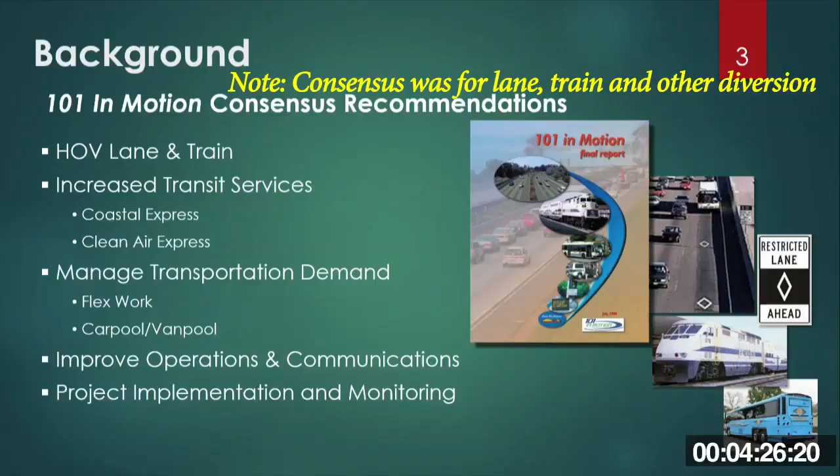The lane and the train strategy was really all about adding an HOV lane in the section of 101 where it remains two lanes in the southern part of the city of Santa Barbara down through Carpinteria to the county line. The trains portion of the strategy was to bring commuter-friendly rail service up into Santa Barbara from Ventura and points south, and up into Goleta. Those are the key components, and then there was additional components in terms of increased transit services, managed transportation demand, and other smaller components that were all about this larger package working together to provide congestion relief long term.

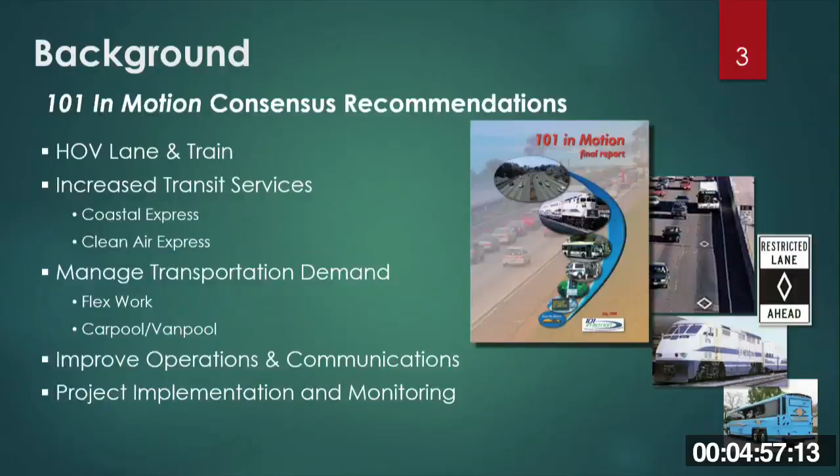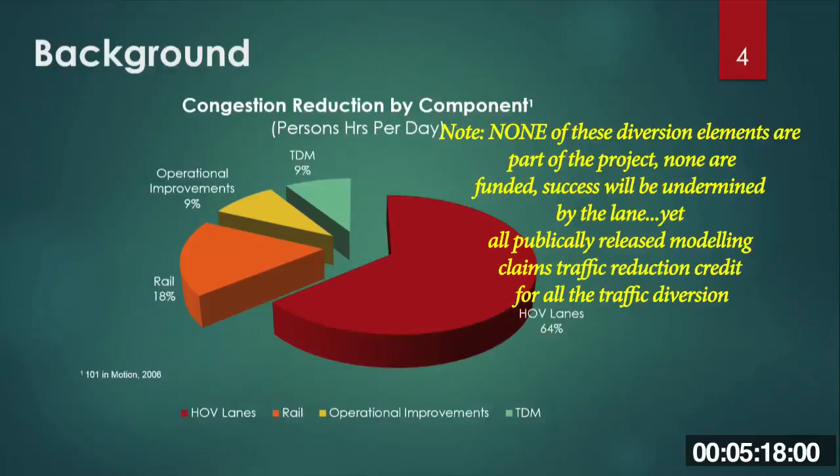This slide shows the different components and the amount of benefit they bring to the table in providing that long-term congestion relief. As you can see, the HOV lanes are a key part of that. The other thing you can see here is that the larger strategy all has to work together ultimately to provide the congestion relief we need. Additional commuter service on its own does not provide the congestion relief we need, nor does an HOV lane project on its own provide that congestion relief we need.

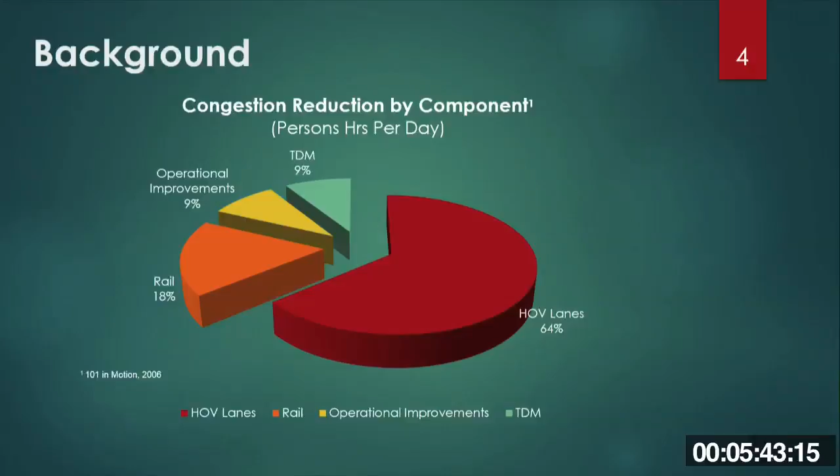The other thing I'll mention is that the HOV lanes are peak hour focused HOV lanes, which means they're available only to selected users during peak hours to manage those peak times, and then the rest of the 24-hour day and on weekends, it's available to any user moving through the corridor.

So how does this lane strategy come together? The one component that's the HOV portion of it. It's really a four-part strategy, and 3 of the 4 pieces have either been constructed or are under construction now.

The first is the Milpas to Hot Springs project, completed in 2012 in the city of Santa Barbara. The second is the Mussel Shoals to Carpinteria project, a 6-mile long project that provided HOV lanes in each direction on 101 from the community of Mussel Shoals up through into the city of Carpinteria.

The third project is the Linden and Casitas Pass interchanges project that's under construction now. If you've driven through there, you'll see a lot of disturbance. That project is fully funded and under construction, and it should be completed in about 3 years.

The last piece of that puzzle is the 101 HOV lanes project. That's the fourth piece, number 4 there. That's the subject of the project today and the environmental document we just released. It will provide the final piece of this larger picture, providing HOV lanes all the way through that 16-mile corridor.

The other thing I want to mention is that there's a series of related or parallel projects associated with the HOV and other improvement efforts in this corridor. Two of those are highlighted in the city of Santa Barbara: the Olive Mill intersection with Coast Village Road, and the Cabrillo Railroad structure replacement.

There's also others in the county and down in Carpinteria, specifically Olive Mill, the railroad structure, and the San Ysidro interchange. The SBCAG board in 2014, as part of a larger decision supporting the HOV project moving forward, deemed those specific improvements as important parallel improvements, directing SBCAG staff to work with local jurisdictions to move those projects forward. So those still have that designation, and they are taking on a life of their own and moving forward.

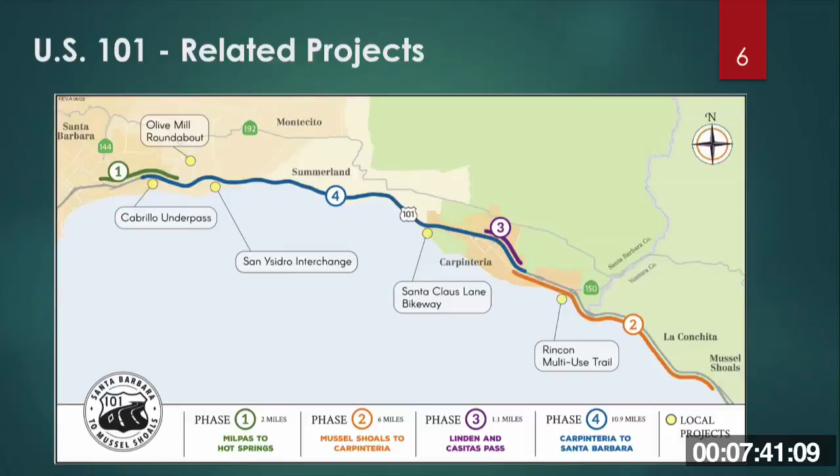So with that, I'll turn it over to Jason Wilkinson. Why don't you go ahead and we'll switch. I'll just, do you want me to do this? Okay, yeah, that's fine.

So just to give a little history on the project: we released a draft environmental document in March of 2012. We received comments from federal, state, and local governments along with the public, responded to those comments, and released a final environmental document in August of 2014.

Shortly thereafter, there were 2 CEQA lawsuits filed against the project. One had to do with noise, and in that case the judge ruled in favor of Caltrans. The other related to the traffic analysis, in which the judge ruled in favor of the plaintiff. A writ was issued in January 2016 shortly thereafter.

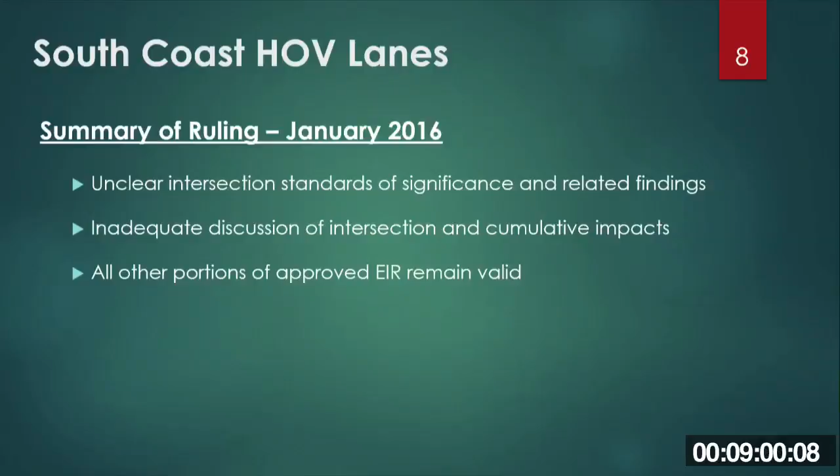A summary of that ruling was that Caltrans did not comply. The other important point that came out of that writ was that all other portions of the EIR remain valid, so the body of work completed in the report remains valid.

So what the Caltrans team did after the writ to comply with it is that the environmental team met with headquarters staff, environmental staff, along with our legal team and the traffic engineers at headquarters traffic. They came up with established evaluation methods and standards of significance that could be used throughout the corridor, and applied not just through the corridor but statewide. They performed the analysis, developed findings, and then released the draft revised EIR.

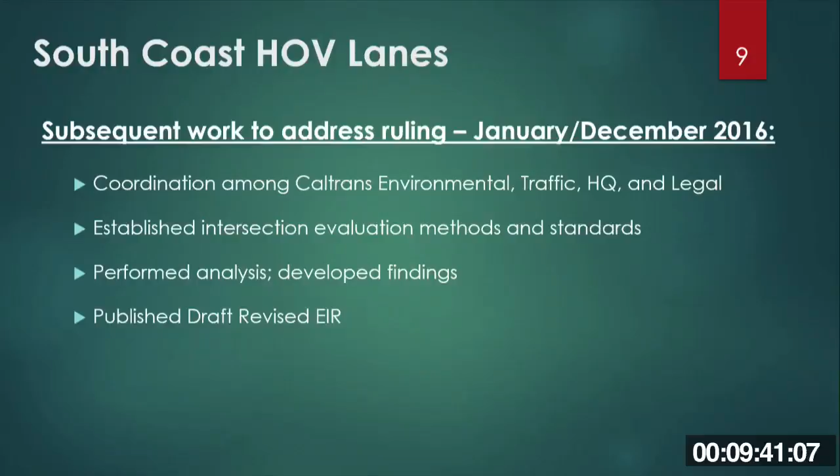It's important to note that a number of technical studies were prepared for the project. They were generated by Dowling and Kittelson Associates, which established a traffic analysis subcommittee involved in preparing the model for the project along with the operational analysis. That team comprised members of City of Santa Barbara staff, City of Carpinteria staff, and county staff, and they reviewed all of the work products that came out of those studies.

On December 2nd, the document was released to the public for circulation. It was originally set for 45 days public circulation, but at the request of the City of Santa Barbara, we extended that to 60 days. The document is available at our website, along with the libraries listed there, and at our office in San Luis Obispo.

If you'd like to make a comment on the document, you can submit it to the address listed on the website or inside the environmental document. You can provide a comment a number of ways, and we'll be accepting comments up until January 31st of this month.

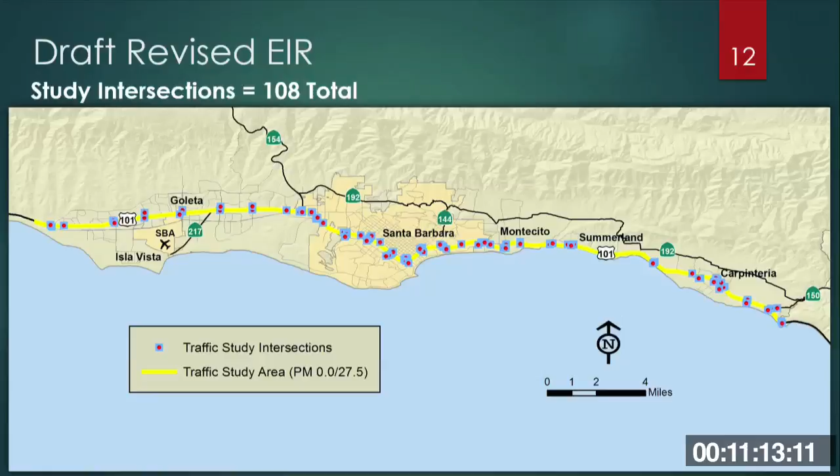This slide indicates the 108 study intersections that we looked at. They begin right at the Santa Barbara-Ventura County line, all the way up to Los Carneros in Goleta. So there's 108 study intersections that we looked at.

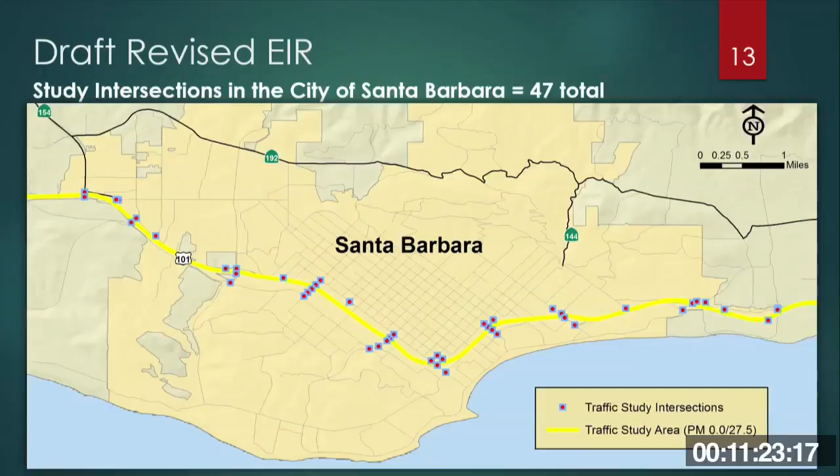This just focuses on the city of Santa Barbara. Within Santa Barbara, there's 47 study intersections that we looked at that were part of our analysis.

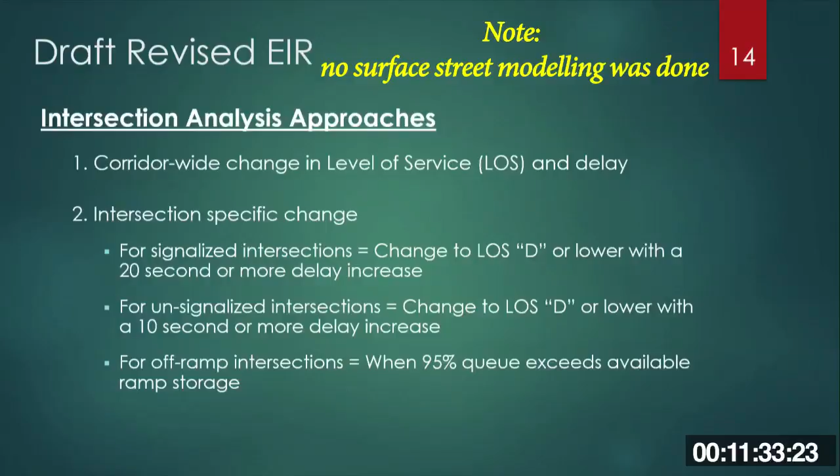Our approach, which came out of meeting with the environmental team, was to look at the corridor at level of service and seconds of delay. We'd next look at the study intersections, and what we'd look at is whether or not the intersection had changed from a level of service D or lower with an additional 20 or 10 seconds based on the signal type. The other thing we'd be looking at is the 95% queue for the off-ramps.

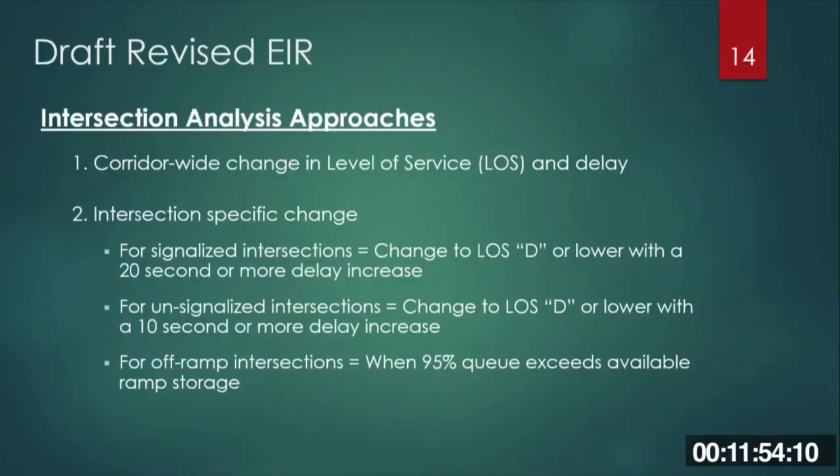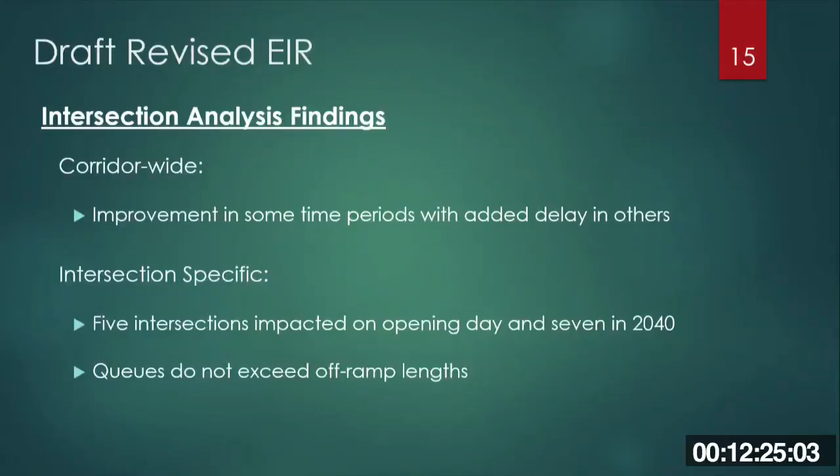What we found is corridor-wide there were some improvements during some periods of the day and added delay in others. When we looked at the study intersections, 5 intersections were triggered on opening day and 7 in 2040 - 5 of the 7 are triggered at opening day and in 2040. We also discovered that the queues did not exceed the off-ramp lengths.

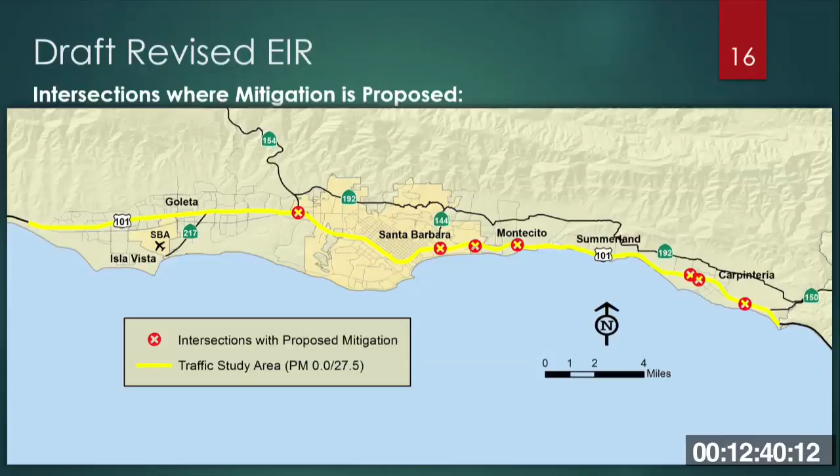This slide shows the 7 intersections that were triggered by our standard. There's 3 in Carpinteria, 1 in the county, and then 3 in the city of Santa Barbara. These 3 are the ones in the city of Santa Barbara: State Street 154 southbound on-ramp, Milpas southbound off-ramp (the first one), and the Cabrillo-Los Patos intersection.

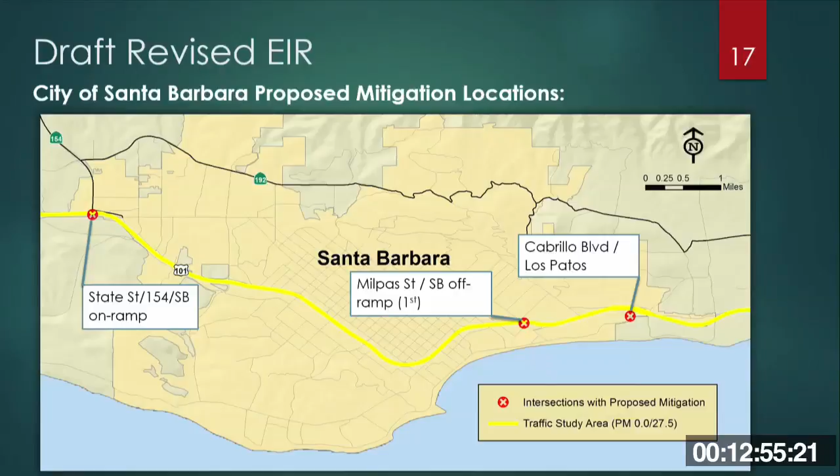For our proposed mitigation strategy, for 2 of them the state would take the lead on making improvements at Milpas Street southbound off-ramp and State Street. The options there would be a second right-hand turn lane ramp at Milpas, and for State Street/Route 154, signal coordination and optimization. At Cabrillo-Los Patos, Caltrans would be looking to make a contribution to the city for them to make the improvements, with 2 options: install a signal or a single lane roundabout.

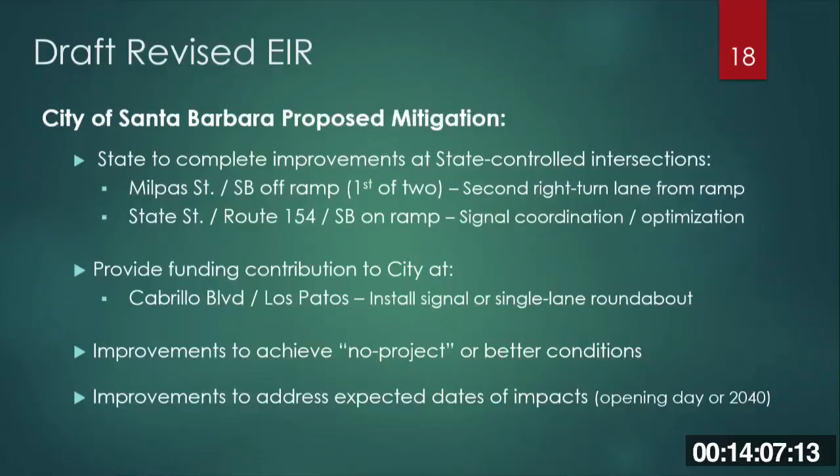Our strategy would be for improvements to achieve no-build or better conditions. For example, if an intersection with the project had an additional delay of 10 seconds, then any mitigation we provide would reduce the delay by at least 10 seconds. Improvements would be expected to be completed prior to opening day, and the ones for 2040 would be expected to be constructed prior to the impact.

In terms of local agency coordination, we've already been meeting with the city of Santa Barbara. We met with them before we released the draft revised environmental document on December 2nd, and we've had a couple meetings with them since then. We're looking to continue coordinating with them on determining mitigation options and the amount of funding towards contribution to Los Patos, and ensuring that improvements take place prior to opening day.

At this point, I'll be handing it over to Scott E. so he can discuss the next steps on the project.

Thank you. Okay, second to last slide here. In terms of our process moving forward, we expect to accept public comments as well as comments from local jurisdictions and other agencies, and then complete the final environmental document. We'll be looking at every one of the comments that comes in and responding to comments related to the content of the document, then integrating those into a final revised EIR.

We expect that would be approved in late spring of this year. From there we move directly into beginning final design and permitting - part of that is coastal development permitting for the first phase of the project - and begin construction shortly after that.

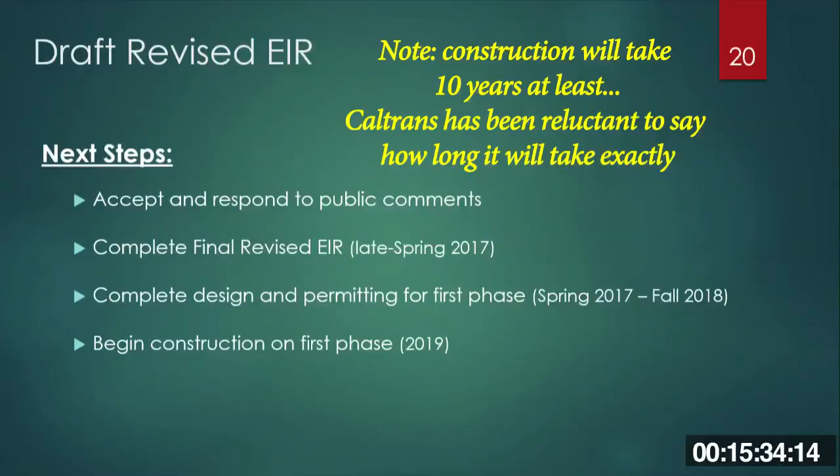Just as a reminder, due to the size and scope of this project, we'd be expecting to construct it in smaller pieces - probably 4 to 5 independent pieces that could be funded and then move into construction independently.

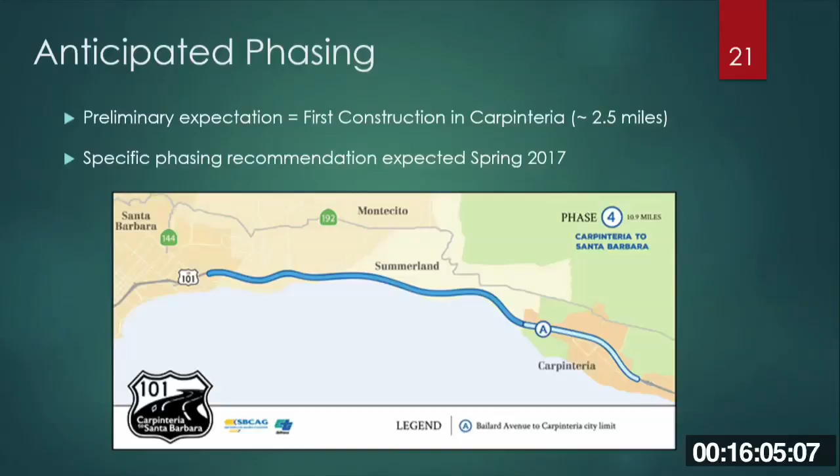In terms of our early expectation for phasing, the preliminary expectation - discussed recently in front of the SBCAG board - is that the first segment, or first phase, would likely occur in the city of Carpinteria. We're also working towards a specific phasing recommendation which would go before the SBCAG board in spring of 2017. If there are any questions on the phasing or related projects, either Tony Harris or Fred Luna are also available to address that content.

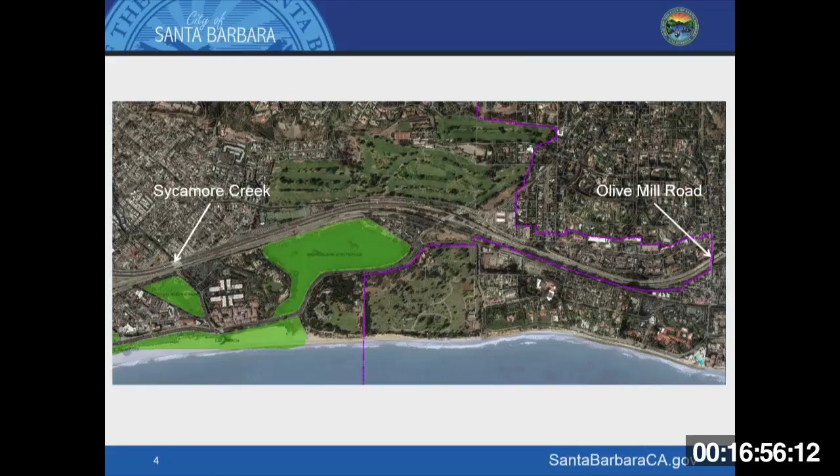You saw a slide very similar to this in Mr. Eads' presentation. What I want to call attention to is the portion of the project that is actually within the city of Santa Barbara. It's a pretty small portion when you consider the totality of the mileage, but from Sycamore Creek, this is the bird refuge, over to the interchange at Olive Mill is the portion of the project within the city of Santa Barbara, and the entire portion of that is also within the coastal zone.

Caltrans is the lead agency and has prepared the environmental impact report. We're the responsible agency, or a responsible agency. Here's what a responsible agency does, and this is what the Planning Commission should be looking to when you think about comments. The comments on the EIR should really focus on the shortcomings and additional alternatives or mitigation measures.

I'll narrow that down even further by saying what Mr. Eads said about the judge who did the writ on the first EIR really narrowed the scope to the intersections. So the revised EIR is focused just on intersections, not air quality or visual impacts.

We're looking at intersections. The Planning Commission must use the EIR for its review of the coastal development permit. So when it comes time for Caltrans and SBCAG to come for a permit, the coastal development permit, you will have to use this document as your decision-making document, specifically for mitigation measures.

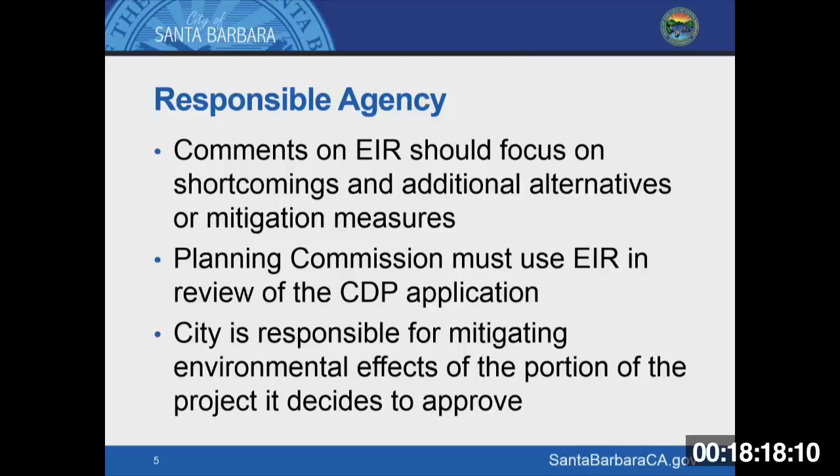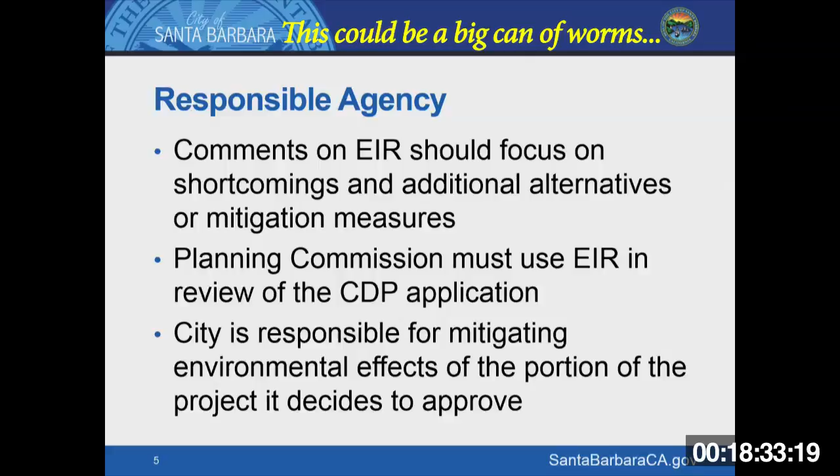If the city becomes responsible for mitigating environmental effects of the portion of the project it decides to approve, because we're a responsible agency and a permitting agency, any impacts, we become responsible for those impacts when we issue that permit based on what the environmental impact report says.

This slide you don't have in your packet. I just thought it'd be interesting to talk about, because when we talk about the freeway having a world of good, it's to help people get here. The major goal is to help people get here, primarily from Ventura and beyond, to the job supply that we have here. I just want to harken back to pre-1991.

It's an important year to me because that's the year I came to the city and took a position with the city, but it's also the year the signals came out of the crosstown freeway. What I've got up there is green would be free flow and red would be backup. This was the condition when we had the signals.

The reason those lines are a little bit apart coming in—this would be coming in from the south—is the signals started about here at Anacapa, and then the signals started right after Castillo coming southbound, and the backups would fluctuate like that. So we had a very robust system aside from that.

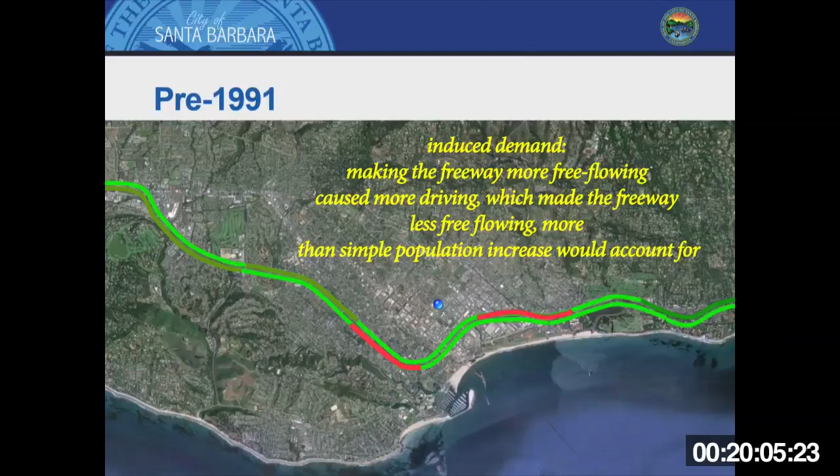When we took out those signals, we provided the capacity we really needed through our city, and we also made it much more attractive to live further away from the city. That was also, as it's the goal of the freeway expansion we have before us now—it was also a goal then, to get people in to see jobs.

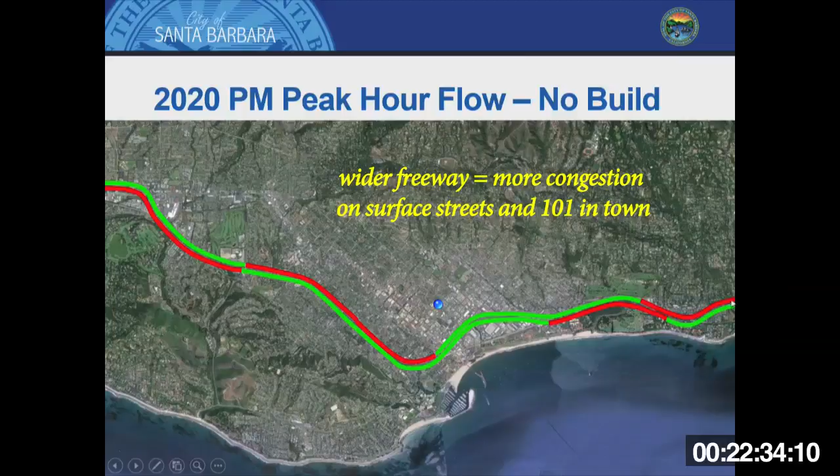Conversely, in the PM peak hour, this would be the 2020 vision for the PM peak hour flow, think evening. This would be without the freeway improvements, and you can see right here the current bottleneck over in Montecito, and the backup that occurs now from that. You can see a backup coming into the city for the northbound direction, and the congestion points at Las Positas, and the backflows that occur.

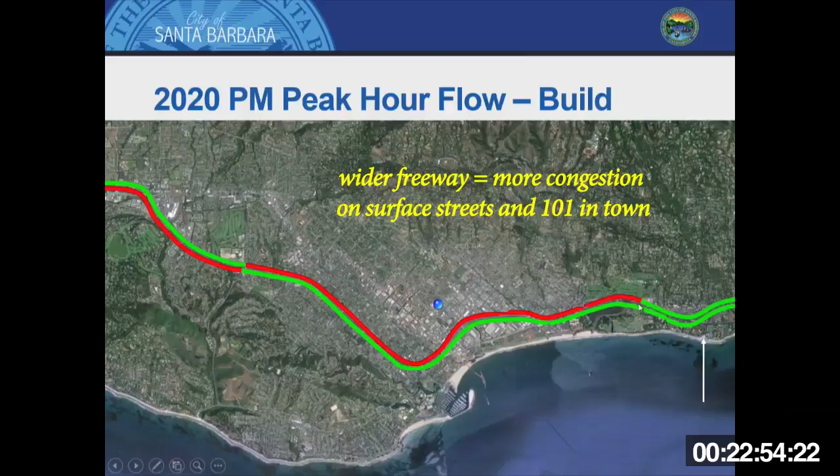When we add the freeway and release this congestion right here, what happens is it moves in here, and the queue gets longer through town all the way backed up into Montecito. The good news, and that's what we're trying to achieve, is that there's no more bottleneck here, and people can leave the city a lot faster.

So there is some improvement, even from some intersections in that standpoint, and that was acknowledged in the presentation that Mr. Wilkinson presented.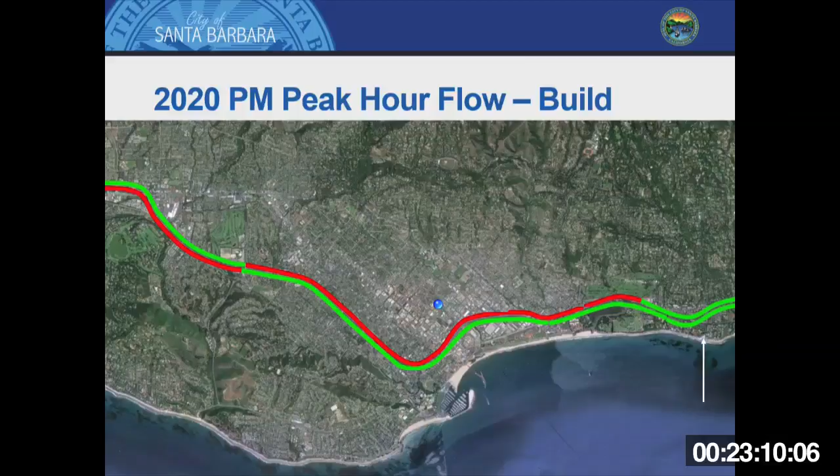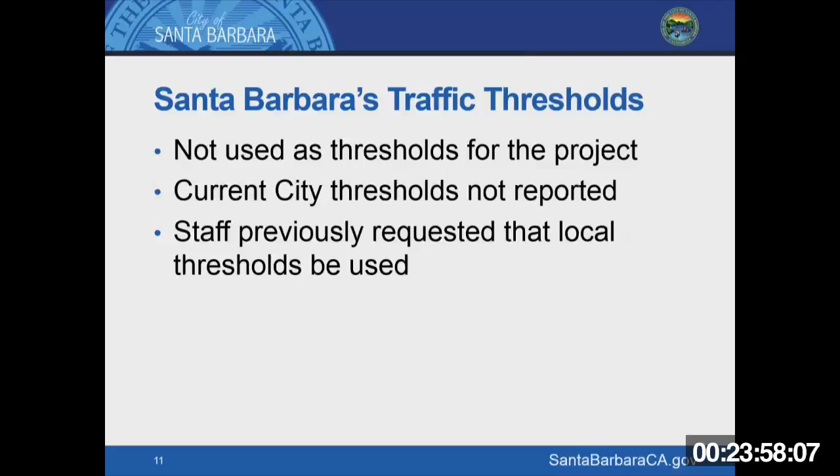So kind of getting back to the intersections in the EIR, Mr. Wilkinson mentioned that we were part of the team that developed all the documents that went into the EIR, particularly the forecast document, which is an appendix. So you didn't see that unless you went and looked online.

What was used at that time, and that's not in this document, but at the time before, was the congestion management program or plan thresholds, CMP. There you have the thresholds right there: at D, adding 20 trips; at E, level of service at an intersection, adding 10; and F, adding 10 trips.

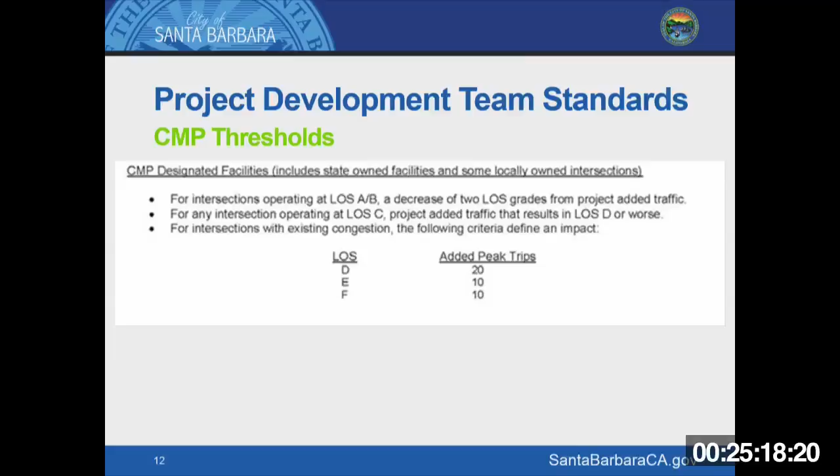The reason that made sense to us at the time is because the freeway expansion is itself a congestion management program project. There was a deficiency plan in the congestion management program, and that created the freeway deficiency. So looking at the intersections along the freeway, particularly in the city, if they were going to trigger congestion management triggers, we thought that was appropriate. It's kind of like apples to apples.

Under those thresholds, the study identified 6 project-specific impacts in the city and 9 cumulative traffic impacts at intersections. Those impacts turned out they weren't disclosed in the EIR, which eventually became part of that lawsuit issue. Impacts to the congestion management program, or those impacts cited in the document, will cause future capital expenditures that the city will be responsible for.

So those thresholds weren't used, and what we find, as Mr. Wilkinson explained, is a different one. I'm going to explain it because we're not familiar with the HCM. We're mainly doing ICU, which is a percentage of the intersection.

This is actually delay. This is preferred in the industry for operations mainly because this is the actual number of average seconds that a person would expect to be delayed at an intersection. That's how we measure congestion. You can see some of these seconds of delay and descriptions: level of service C, 20 to 35 seconds of delay, and D, 35 to 55 seconds of delay. The thresholds that were picked are based on that delay.

When you get to it, Caltrans calls them standards of significance. Anything that goes from level of service A through C to D, or then once you're at D, adds 20 seconds of delay. You can kind of see where that makes sense, or what it actually represents. At D, the first D is 35 to 55 seconds, so 20 seconds would be a full level of service change.

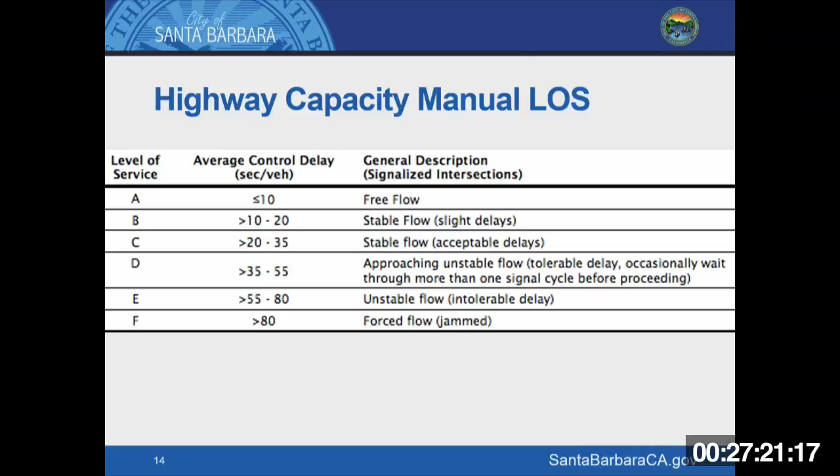That becomes the standard that Caltrans is measuring in this document when there's a full level of service change or degrading. The project-specific versus cumulative distinction is tied to 2020 versus 2040. If there's an impact in 2020 with these thresholds or standards, then it would be a project-specific impact, and if it occurs in 2040, then it would be a cumulative impact.

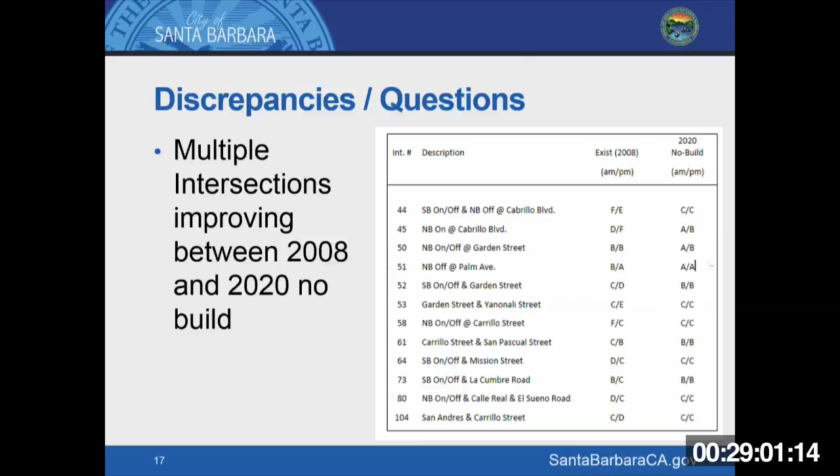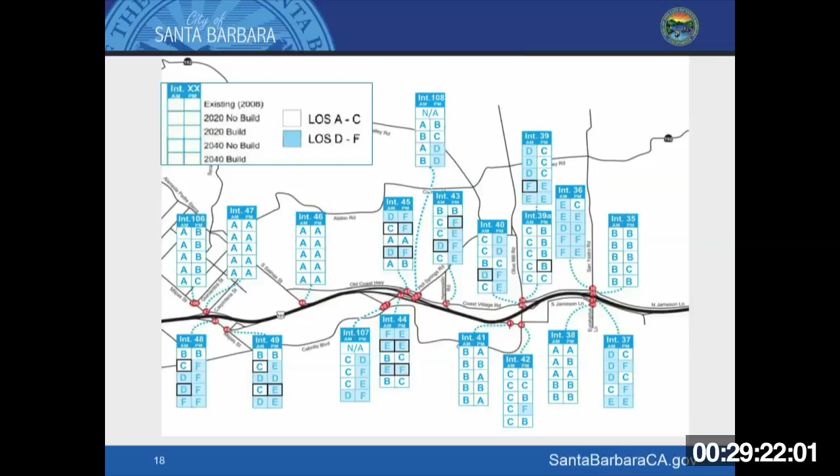Under those standards, as mentioned, there are 7 intersections corridor wide, 3 within the city, and those were pointed out. We wanted to make Caltrans aware of this immediately because we've been in dialogue, and it's been very helpful with the team. They came back with some responses that I want to make sure we're showing, noting that there are some errors with the ones that have boxes on them, and they're going to be looking to correct those levels of service to show what happened or what was wrong.

Any of the intersections that have boxes in the scenarios, they're saying, need to be revised. And just to show you the Carrillo one, this is the level of service F that goes to C. It's those kind of things that concern us, and we want a good explanation of why, because if the baseline they're considering the freeway against gets better, then there's a lot more room for impact.

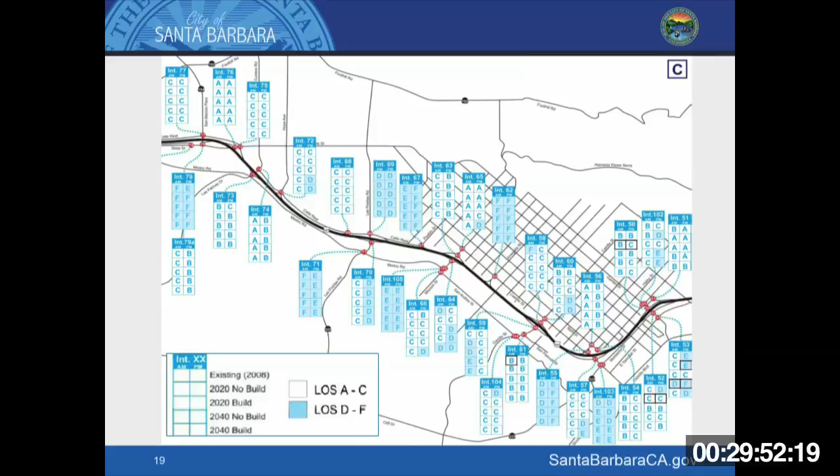Other discrepancies in volume sets that we found in Table 2.2, which is in the body of the EIR, are some math errors in transferring from the 2011 forecast document to the current document. These intersections show in this column what the freeway is adding for the 2040 analysis. So the document says these volumes are added, for instance at Milpas and Quinientos, it's saying 15 trips added in the EIR, when in fact it's 235 if you do the math from the forecast document. Another example, at Indio Muerto and Milpas in the AM, the document says only 9 are added, when it's 637 trips added in the 2011 forecast document.

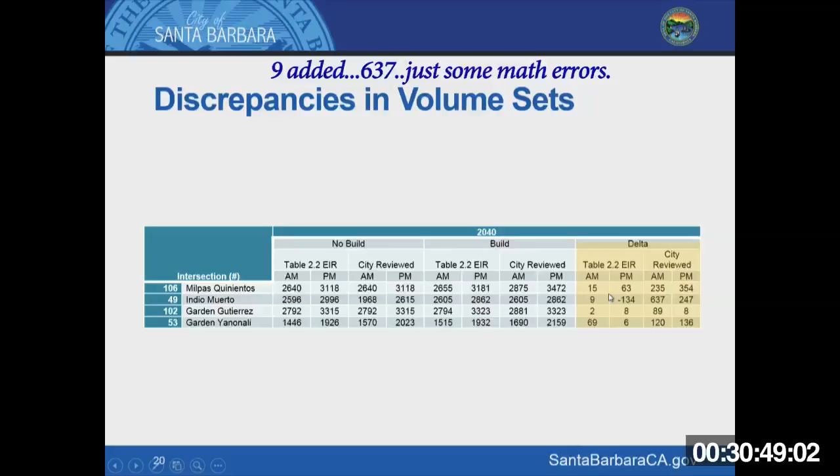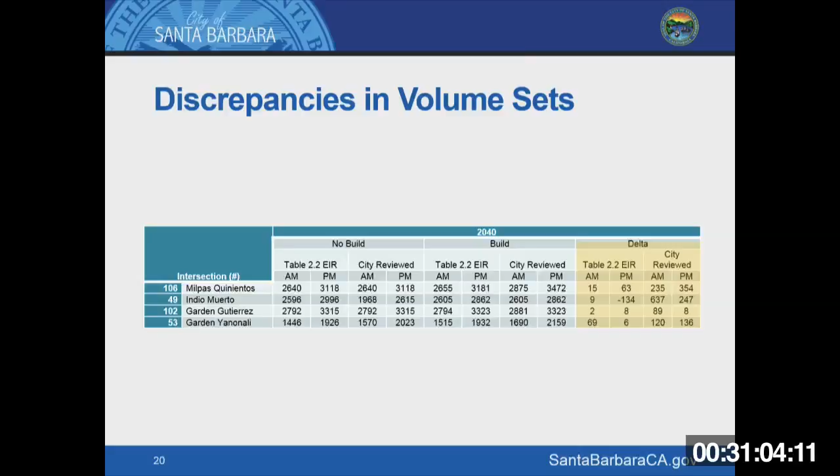So just some math errors somehow carried forward. I mentioned these to Mr. Eads, and we will continue to work with Caltrans to find out what exactly is going on, and if the level of service is wrong.

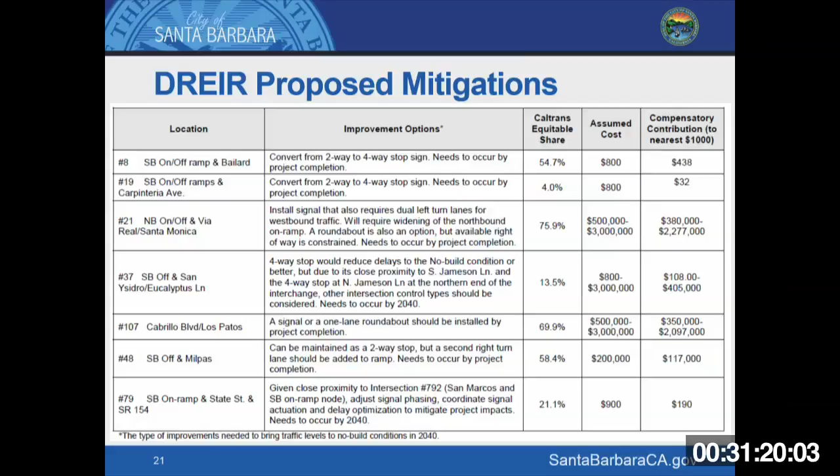These are the proposed mitigations from the document, and again 3 of these are intersections. I want to walk you through those mitigations and some of our challenges with this. We'd like to have that dialogue, we'd like to see it in the document. Project-specific impacts, in our opinion, if they're project-specific, not cumulative.

Mr. Dayton, I have a question for you. In your opinion, or our city staff's opinion, the data that you have found to be problematic, the calculations, how do they correlate with the proposed mitigations? Because now I'm asking myself, if the data is, I don't want to say wrong, I'm going to be hard pressed to comment on whether the mitigations are sufficient and appropriate if the data on which they're founded is in question. Could you comment? Could you help me?

Mr. Chair, Commissioner Schwartz, agreed. I'll walk you through some of the specifics a little bit about our... Again, you have a question, we have the same question, and we'd like to get to the bottom of it.

Excuse me, may I ask a question, Mr. Chair? Mr. Dayton, just under the discrepancies that you talked about, do you think that the number of impacted intersections are going to increase based on the discrepancies you found? We do, and if I get through the presentation, you'll see all that. There's probably something I have left out, and you're going to have a question. I'm going to be pleased to answer that.

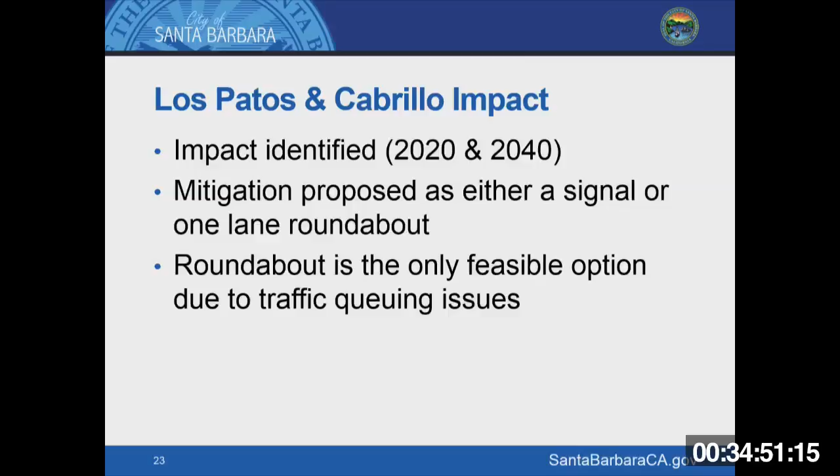The mitigations are to do a roundabout or a traffic signal. So we looked at this, we looked at the traffic signal and found because of the close proximity of this intersection to the Cabrillo interchange and some of the queuing going on from the interchange, a signal is not appropriate from a safety standpoint and a congestion standpoint. So we would like to see the roundabout put there, and we've had some preliminary discussions with Caltrans, and it looks feasible to do that.

On the southbound 101 Milpas impact, this is a little tricky because of the southbound Milpas off-ramp. There's actually two off-ramps for southbound Milpas. If you're going to go south, let's say to the Doubletree or to the Cabrillo Bathhouse, you can get off at the first off-ramp and turn right, or get off at the second one and turn left and get to the same place.

A little bit confusing, but the impact was cited at the first off-ramp, which is this location right here. You get off, and there's no signal here. The proposal to mitigate this primarily concerns a backup onto the main line. So this is a safety issue we are dealing with here. We have that issue at this intersection now.

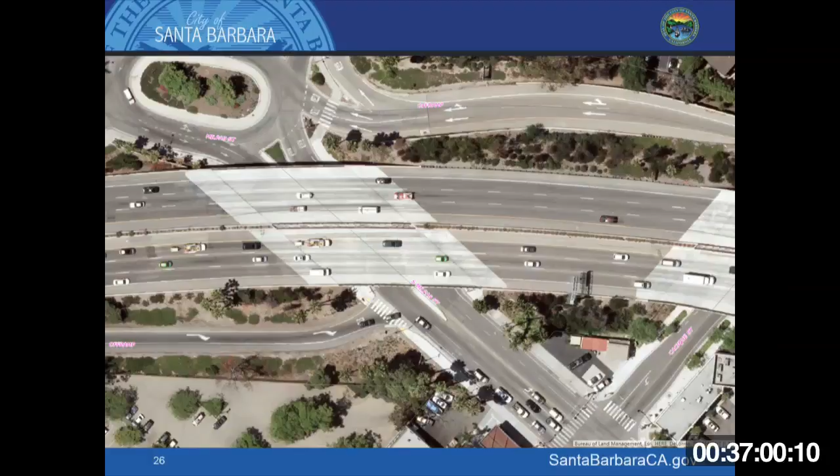So putting dual lanes to do that just makes it more intense for pedestrians and harder, probably a bigger safety issue. There's many pedestrians in this corridor. And so we would look to an alternative mitigation for this.

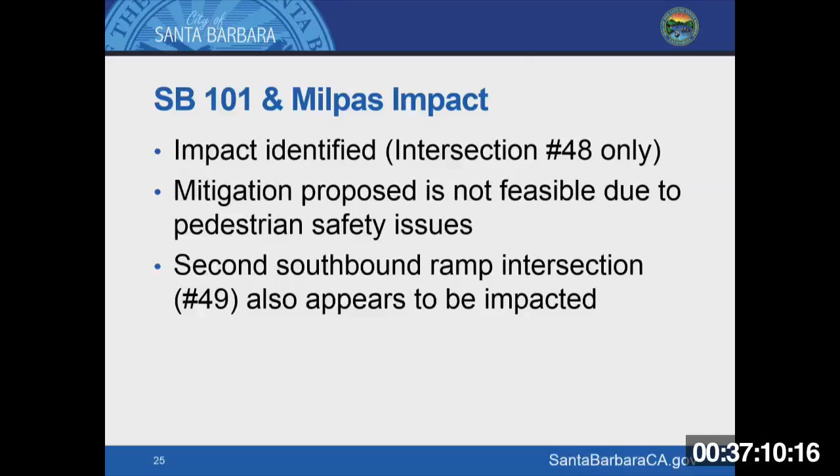And then looking at the other intersection, the second southbound ramp intersection, which is intersection 49, it also appears to be impacted. It's the balancing of understanding the distribution. One of the tricks is understanding human behavior and the balance of what proportion between these two ramps people will actually use - that's one of the things we're challenged by.

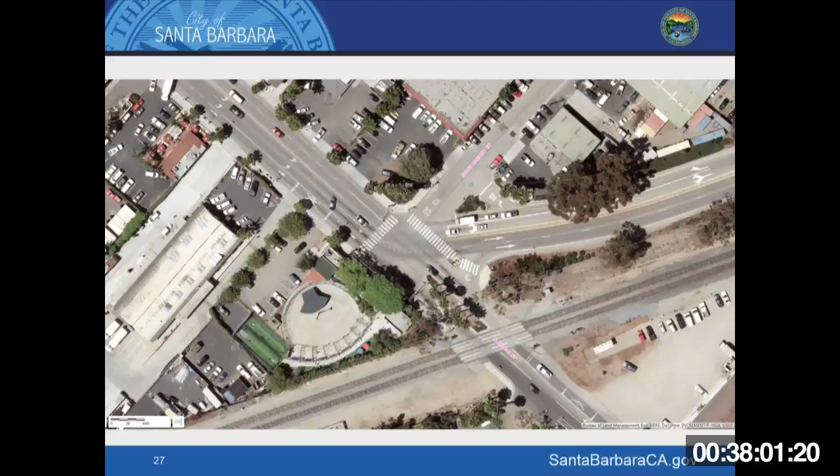This intersection is very tricky because of the Indio Muerto. It causes it to not be a traditional intersection - it's a multi-leg intersection. The other challenging thing is this long pedestrian movement. So the mitigation solutions will have to deal with these two things and try to figure out the safest way to prevent that backup onto the main line.

These are additional impacts - this relates to Commissioner Wiscombe's question. You asked whether the discrepancies led us to believe there were other impacts. And you're correct, it did.

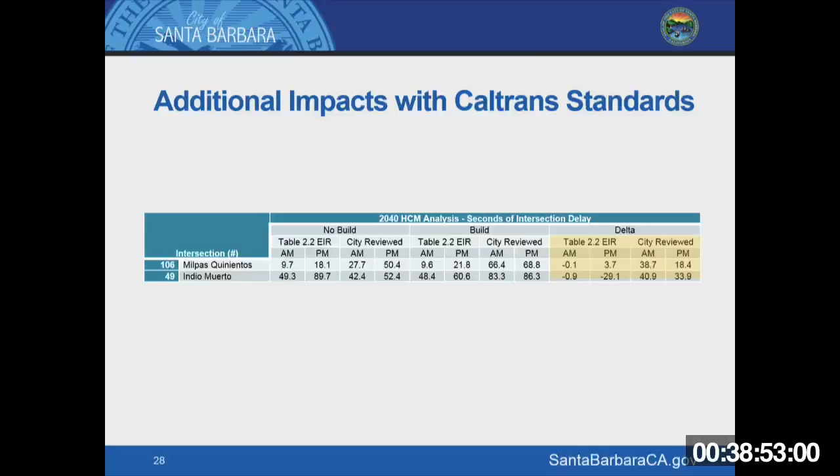These are two examples from the calculations or figures I showed you before. Using the Caltrans standard threshold, these would be triggered as cumulative impacts. This is Milpas and Quinientos, and Indio Muerto at Milpas and the southbound ramps. Incidentally, Milpas and Quinientos was also found to be a project-specific impact in the last round under the CMP thresholds.

The Olive Mill interchange - these are comments those of you who were here before for the last EIR will be familiar with. Now we know much more than we did before because this is one of the intersections that Mr. Eads pointed out as a parallel project. SBCAG, Caltrans, the City of Santa Barbara, and the County of Santa Barbara have been working on this intersection as a parallel project.

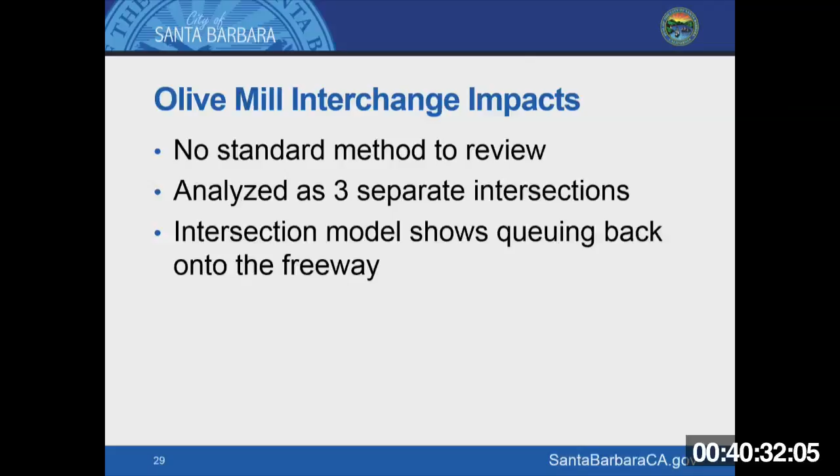We've brought it to you as a roundabout solution, and that roundabout solution can work in this case, we believe. It's still got a long way to go through. But let me tell you the thing that we're concerned about.

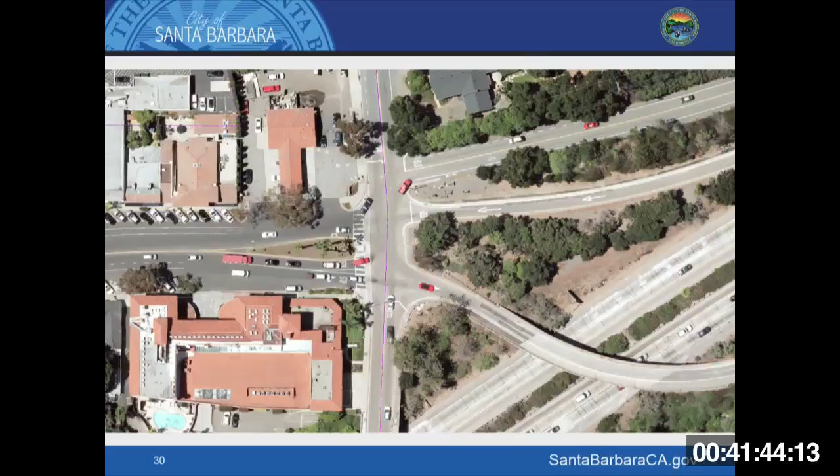We think that the freeway's impact on this intersection is not only an impact, but it's critical to the success of the freeway expansion. The difference between a parallel project and an impacted intersection would be that the project would be responsible for the costs. I think that's the big unknown for people - who's going to pay for the costs.

Sorry if it's hard to orient yourself looking at this, it was for me. The freeway is right here, and the funk zone is over here. The beach is down here. So the queue that's an issue is queuing back into the funk zone - it queues beyond the next intersection.

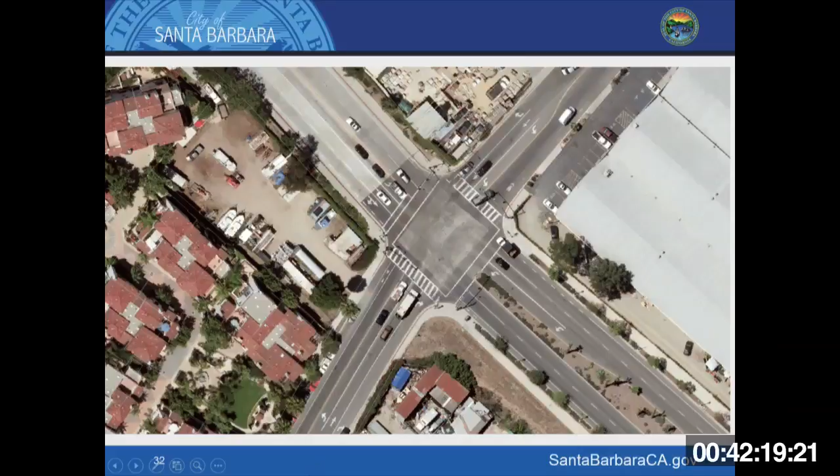Haley Castillo impacts. This particular impact could be a challenge for many of our intersections, so I'm just going to point it out for Haley and Castillo, but this is one of our concerns. This is what happens when we have future congestion.

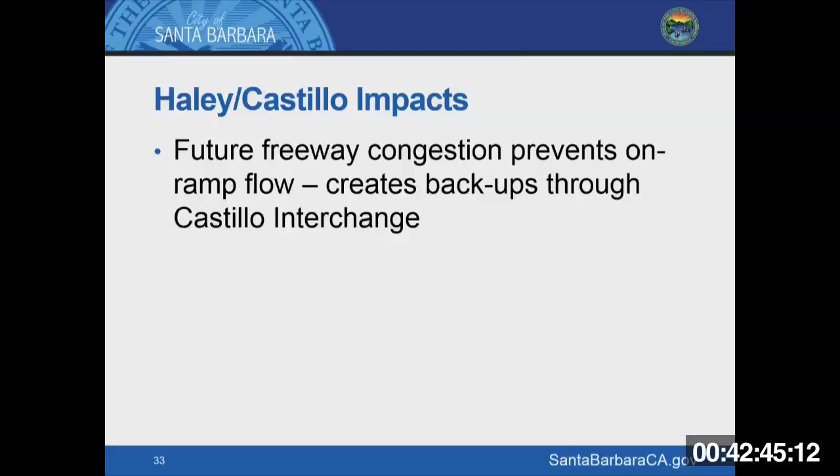Remember I showed you at the beginning how the queues on the freeway change in the peak hours? Well, at the Haley-Castillo interchange, at the Haley on-ramp, there is a tremendous flow of cars coming primarily from Santa Barbara City College, but also the Mesa. They're coming through the interchange, and you can even see how the road is darker here from the travel.

When this light is green, it's green for a significant amount of time because it's only one lane, and we've got to get everyone onto the freeway. The challenge in the future is that the freeway will be backed up, really slow, not enough capacity to take all the green time we can assign it. Then we get backups because we can't get people off the local road and onto the freeway. Mr. Bailey is predicting this would probably take place at Garden Street and Milpas as well.

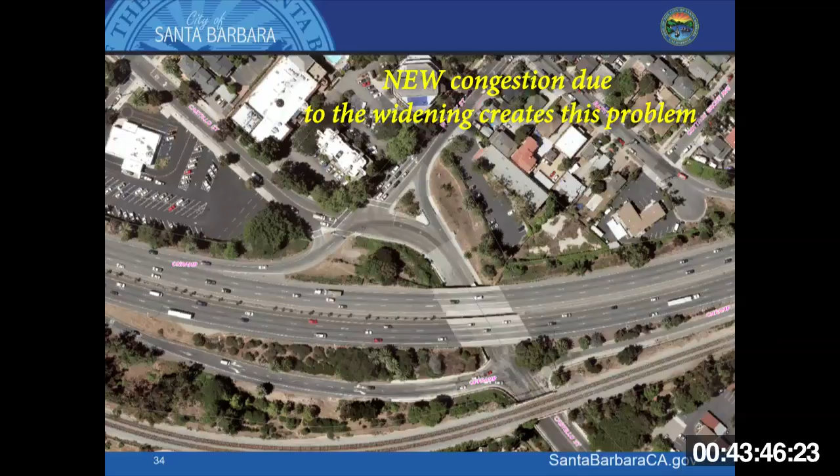It helps if you have a longer ramp where you can queue cars for longer periods of time between cycles. The reason we point this one out is that Haley doesn't have that long on-ramp, if that makes sense.

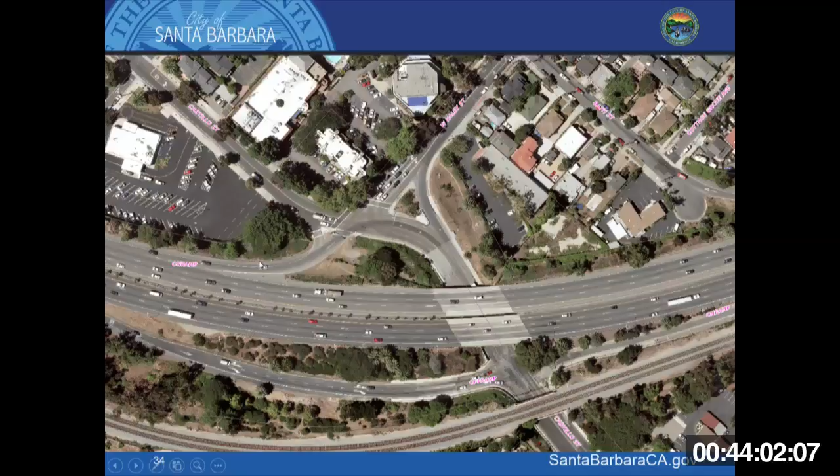The Cabrillo interchange impacts - it's interesting, this is a more recent picture from the internet, but you can see the backup of cars even in the picture to the Cabrillo interchange, and that's mainly because there's only one lane under the railroad.

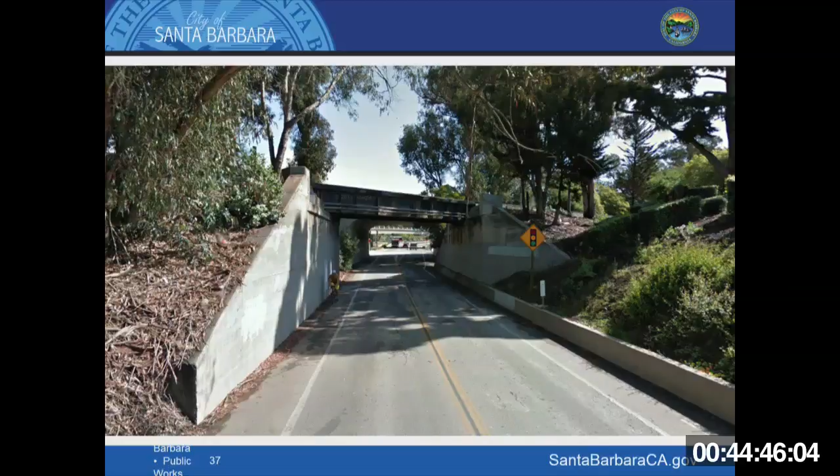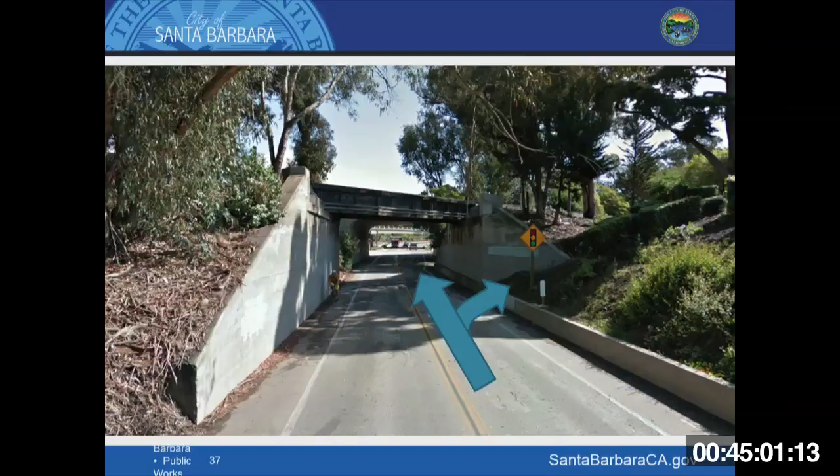So picture when the new southbound on-ramp and the new interchange will be just on the other side of this railroad bridge. When it's a red light and you want to go right, you could go right onto the freeway, but if someone's going straight, you're stuck behind them, you can't get on the freeway, so everyone has to wait for the green light. There's no going around it. And if there's a pedestrian crossing the ramp face, the right turner has to wait for the pedestrian, and the through movement won't be able to go.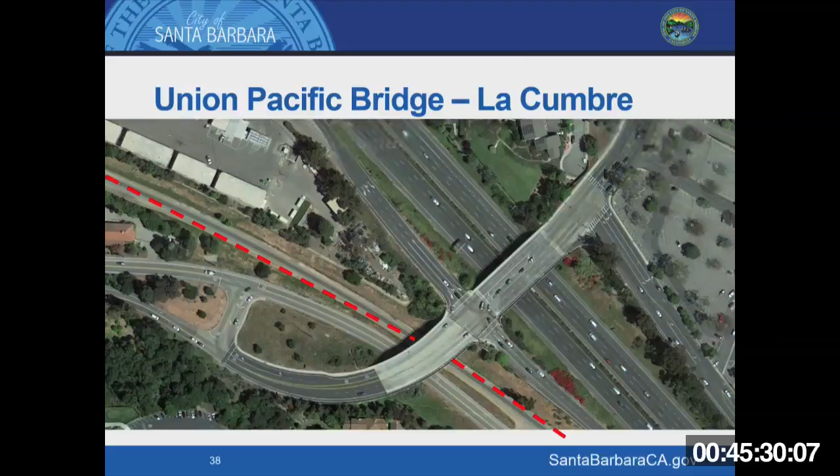This is very typical whenever we do interchange improvements over the railroad tracks - under the railroad tracks is a little bit more of a challenge. This is La Cumbre; when we improved that, you can see the fresh new bridge. When we did it out in Goleta, with the railroad tracks as the red line, we widened the bridge, and it just makes sense to widen it under there.

Having said that, we do have a team effort for a parallel project for the railroad bridge. We don't know how expensive that project's going to be. The question again becomes not that we don't want it, not that we're not all working on it - the question is, how is it funded? We would see this as being a freeway liability and being funded with the freeway. That's how city staff would view that.

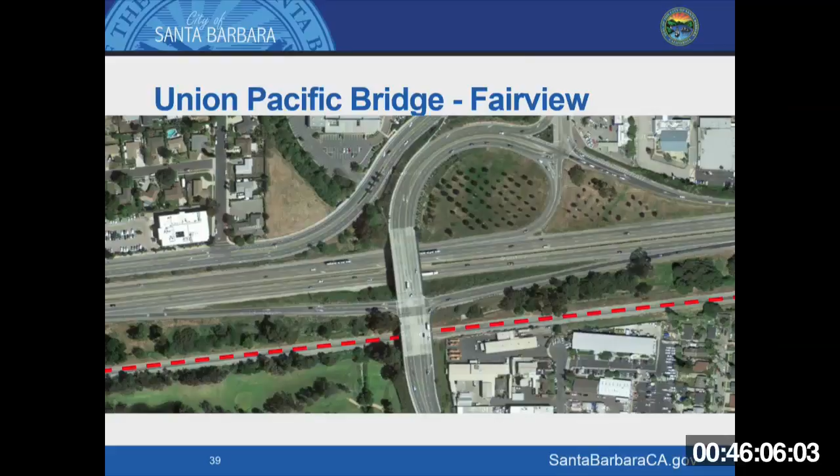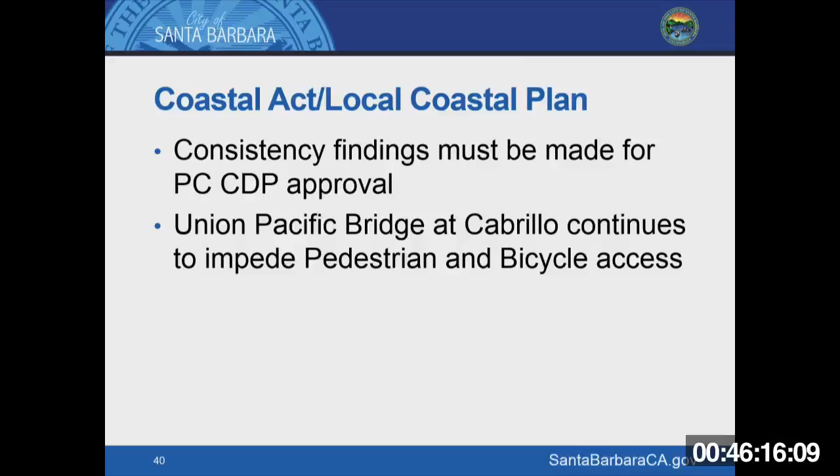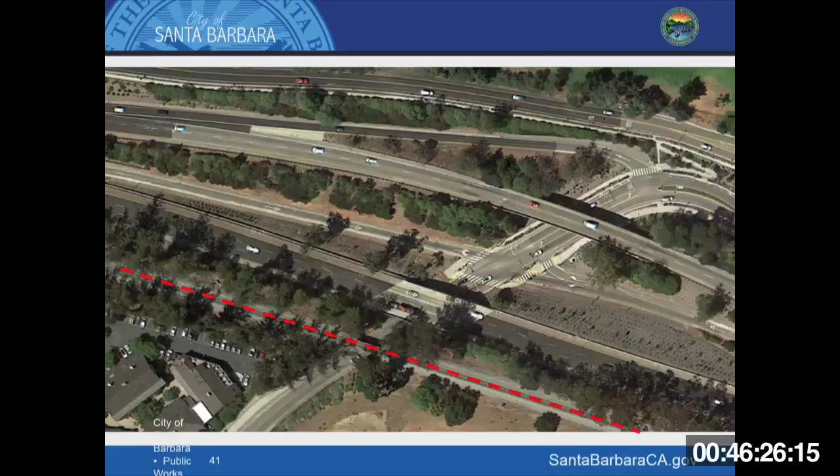Then there's the coastal act and local coastal plan issues, which you're probably more familiar with. This is the issue of getting at the interchange, at the Cabrillo interchange, in the coastal zone - you can see the nice sidewalks done with the last improvement, but then just no connection under the railroad bridge. That would obviously be taken care of if we were to replace that railroad bridge.

The next steps - Mr. Eads spelled them out well for us - it will be at City Council on Tuesday, the 24th of January, and the public comment period closes on the 31st. Then Caltrans will respond with that. I want to acknowledge that we have an open dialogue with Caltrans, and we're working to resolve these issues in real time, hopefully before there's a need for response to comments. Certification of the EIR would be their step after response to comments.

Then at some point we'll be back to this commission with the coastal development permit, and of course the HLC and ABR design reviews, and then the action. Again, the public comment - here's the information to give your comments, directly to Caltrans. As Commissioner Thompson pointed out, if we do get a comment on the freeway, we will forward it to Caltrans, but this is the information if you're watching on TV.

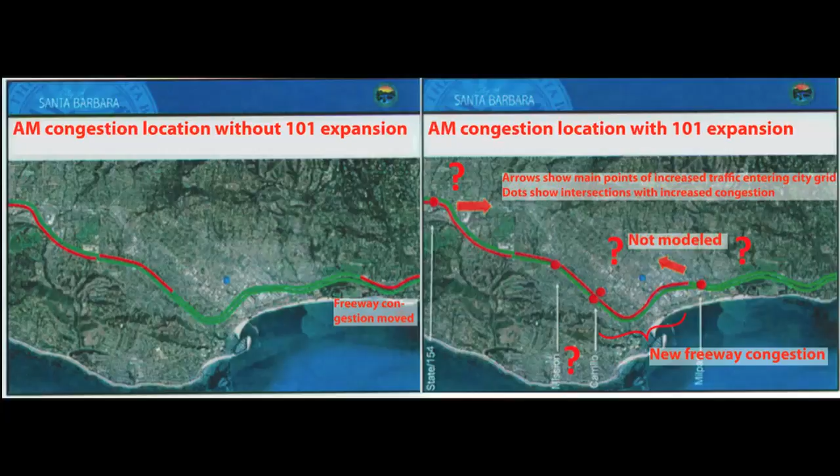Impacts on city bike usage. I asked Rebecca Bjork what was keeping her up at night. I was surprised to hear it wasn't there being 7% capacity in Lake Cachuma. It was actually the unfunded projects on the city road grid.

Imagine thousands more cars on potholed city streets. It's going to make incredibly harsh conditions for bicyclists. Millennials really don't want to own cars. They'd rather bike. How are they going to do that if all those cars are there? And what's going to happen to traffic if they start getting cars as well?

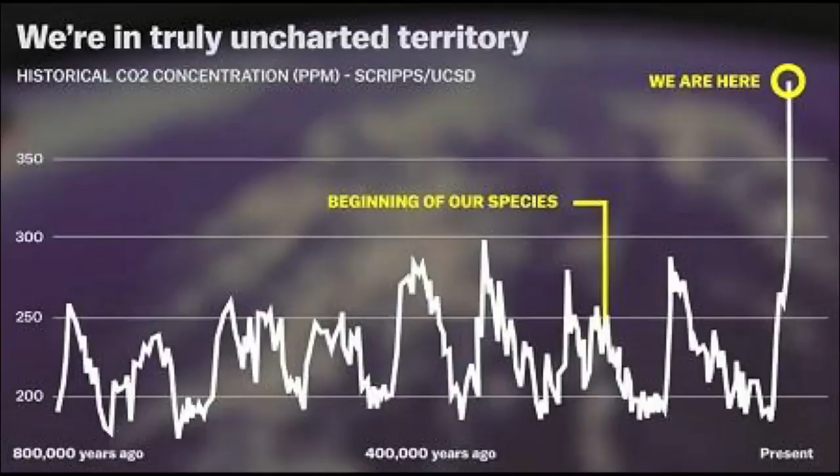All of those impacts are cumulative, by the way. They multiply each other. Climate safety is perhaps the most important lens we should be looking at any decision through, and that's not really considered.

All told, I would characterize this project as a quality of life death spiral. If you want Santa Barbara to be like Los Angeles, this is your project. I don't really feel there's any mitigation possible. I think this would be a type 1 error. I don't think anybody would support this. No one wants to be stuck in traffic, but I think if people could see into the future what it was going to be like, there would be no support for it.